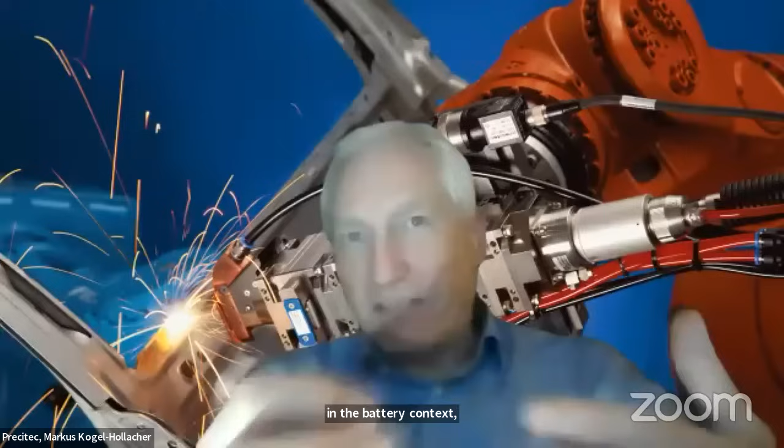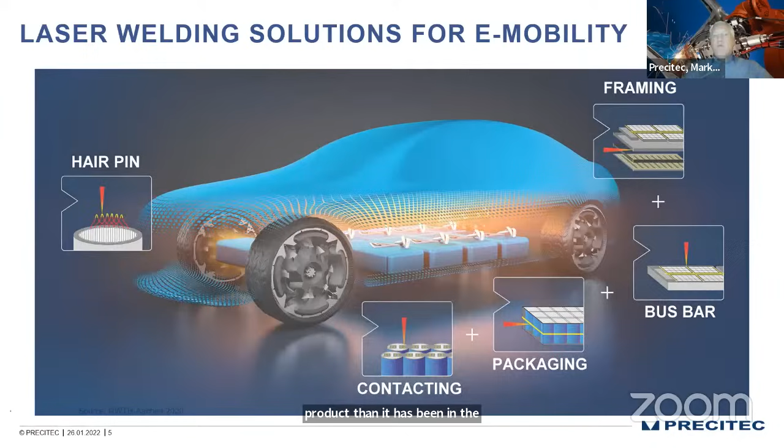The same is if we talk about the materials. If we talk about copper, if we definitely talk about steel - steel and lasers is a winning team, definitely. And I'm pretty sure Andreas Heider will talk about that in his presentation.

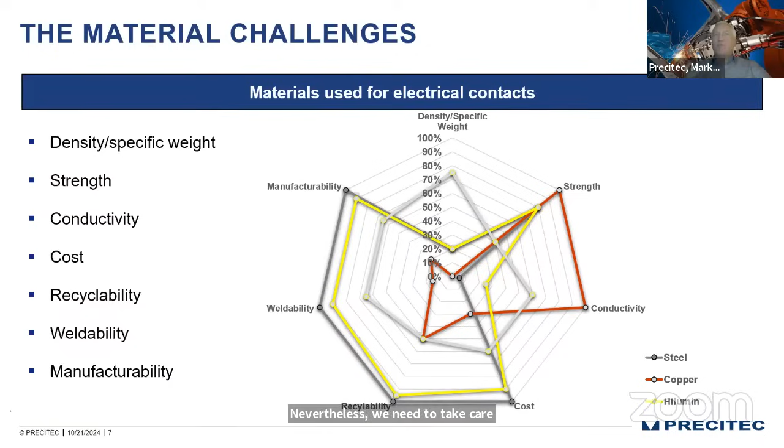Nevertheless, we need to take care about something which we haven't taken care about 10 years ago, and this is the point where we apply the photons. We have the freedom these days to bring the photons to the right point for the specific application, for the specific material. So it's not necessarily just top hat or Gaussian beam, as it had been 10, 15 years before.

We now have the freedom to work on that, and the freedom to work on that is to use beam shaping. There are a lot of choices on the market with respect to beam shaping based on optical elements, but also combiner technology, fiber manipulation technology, and coherent beam combining, which is the most impressive stuff and for sure the most expensive stuff these days, we have to admit.

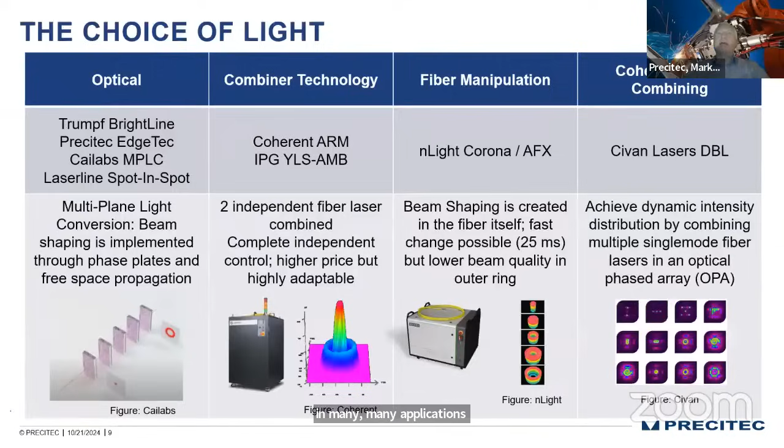Nevertheless, beam shaping is crucial, and it really helps in many applications, also in the applications we are addressing in e-mobility, to increase the quality of the final weld of the final product.

We have done so with our ScanMaster, which is a combination of many Precitec knowledge, from cutting to sensor technology to welding, which is all part of that ScanMaster.

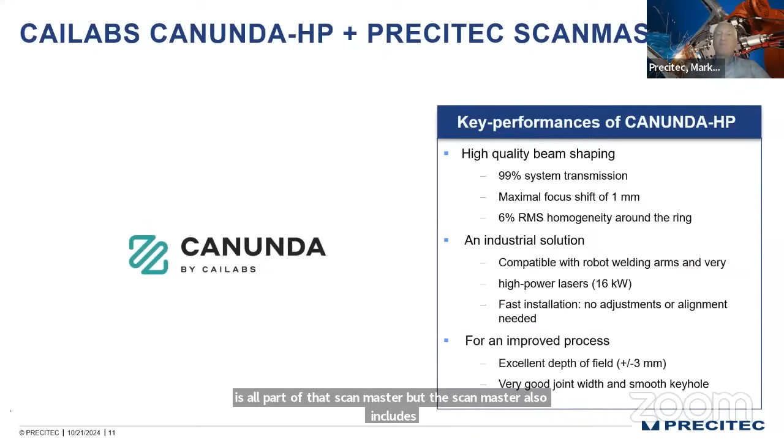But the ScanMaster also includes beam shaping technology, and we have partnered with Cailabs on that, because we have seen that that technology is for us the most promising one, because it can be easily integrated into our beam path, and it can easily change from the old-fashioned just Gaussian or top hat beam profile to a better profile for the specific application.

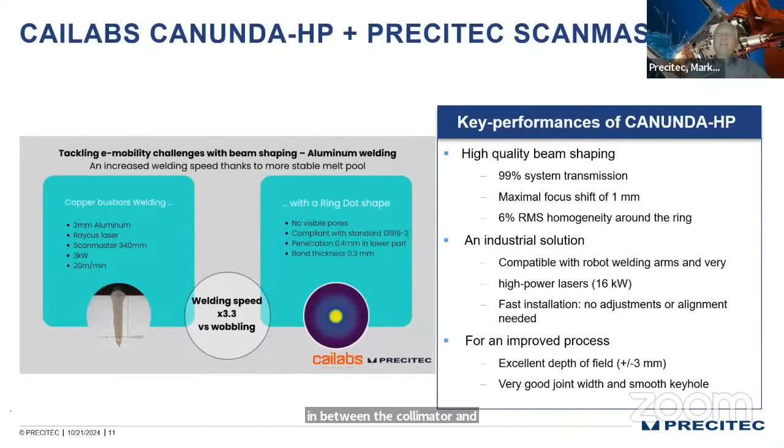Which means for us, it's just an add-on module, which sits between the collimator and the processing head, in order to change the intensity distribution, and in order to increase speed and reduce the spatter formation. So there are many benefits for us to include those elements, to include beam shaping in our beam path.

For sure, and this is what Antonio already said, we are also taking care about the quality by means of sensor technology. So there has always been, and there will always be, Precitec products with sensors - no Precitec processing head will leave the company without at least one sensor. And in welding, it's most probably photodiode sensors these days.

The old-fashioned way of applying photodiode sensors was to get the fingerprint of a process, to calculate envelopes for the upper and lower interaction limits, and to say the process is good or bad.

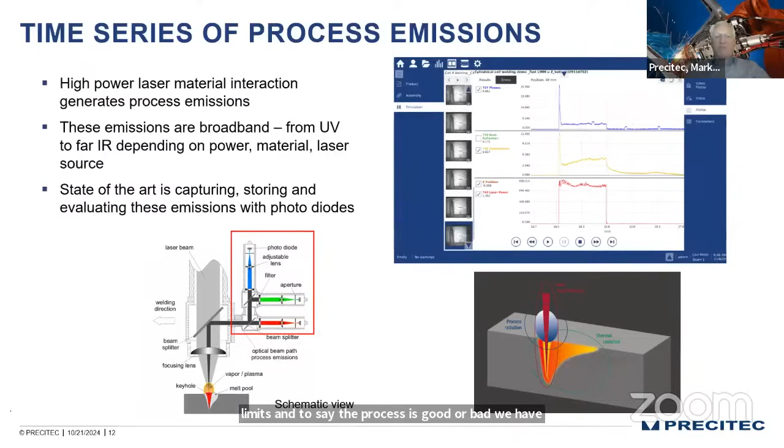So we have taken the chance with customers - one of the customers is Audi - to go one step further. We have now worked on the possibility to derive specific physical information out of that process light.

Customers like Audi, like others, approached us and said, we need more information - just red-green is not enough. We need information about, for example, the strength of the weld, or the electrical resistance, or the depth.

Okay, depth we had in our pockets already by applying OCT. OCT is one of those sensor technologies which was more or less pioneered by Precitec in order to measure weld depth during processing. But this is just one of the physical information customers were talking about.

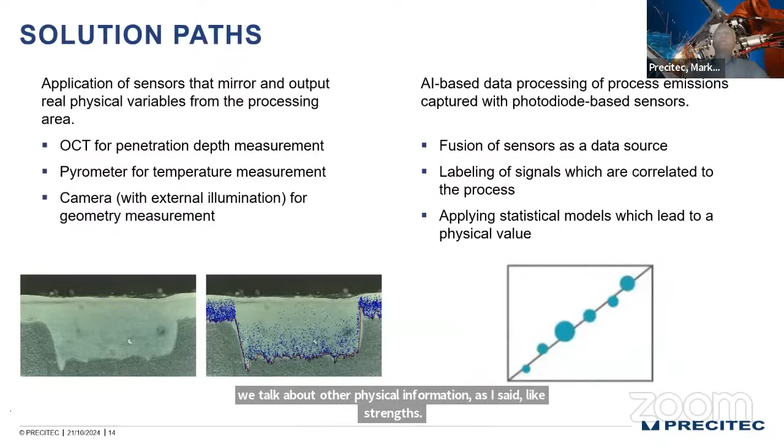If we talk about other physical information, as I said, like strength or electrical resistance, we need to go one step further. And this is AI - we need to apply AI.

We have increased our AI knowledge at Precitec by setting up a department at the University of Karlsruhe, which is the Precitec incubator. These are data scientists - they only know data science, they only know data processing. And they worked on applying specific deep learning algorithms on our time series data.

The one on the left is a high power application, 3.8 kilowatt aluminum welding. The one on the right is micro applications, nanosecond lasers, dissimilar materials. But in the end, for the artificial intelligence approach, it's more or less the same.

We applied an approach based on long short-term memory, LSTM, which is just one of many possibilities in the deep learning portfolio. LSTM may be known to some listeners as the deep learning algorithm behind Siri or Alexa. They also use LSTM.

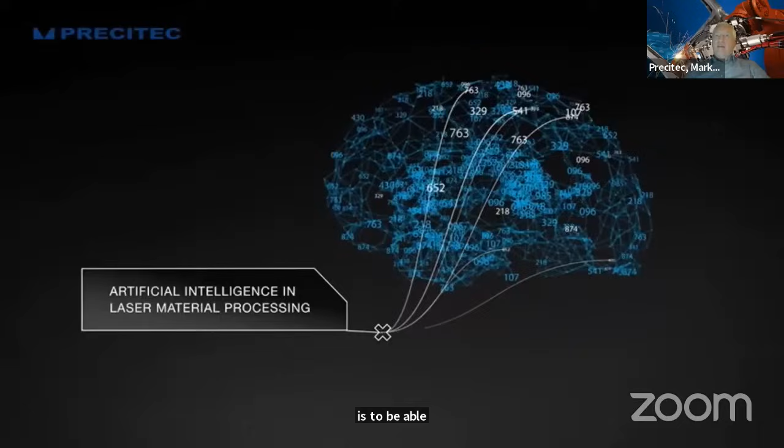In the end, our approach is to be able to work with AI algorithms on laser welding applications, to apply AI algorithms. This is one of the applications we're working on now, and it's different from the two I showed you before.

This here is battery contacting, and the important physical value here is the electrical resistance. Just for example purposes, we've shown here a zigzag welding. Customers use different strategies for welding these contacts.

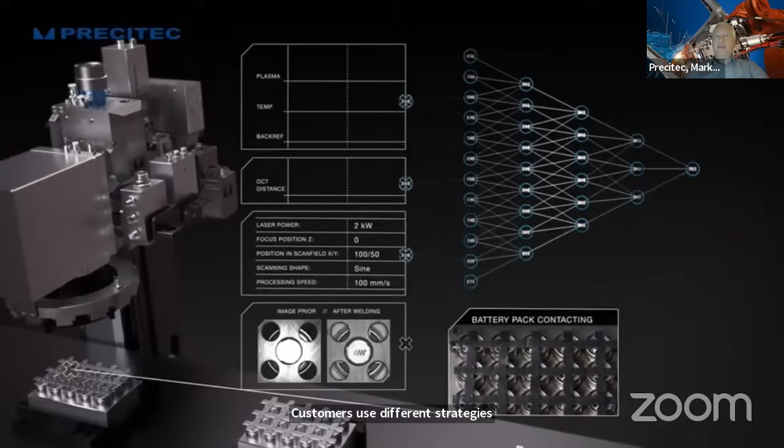Nevertheless, the idea is we get the time series data, apply AI, and in the end derive the electrical resistance directly in microohms out of the emission data coming from the process. You see that we can calculate good or bad resistance.

Together with the customer, we've taken the chance to apply a repair weld next to the original weld, with the hope that we can bring the electrical resistance to the desired value.

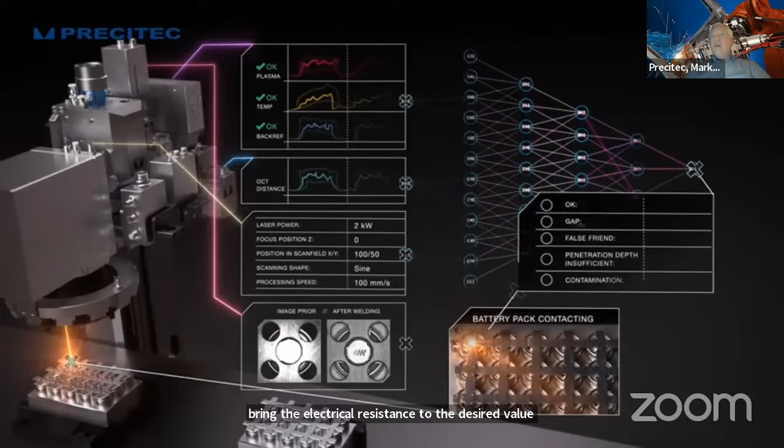We have one customer doing that right now. It's just starting, so for us it's also new technology, new experience. But we're hoping to convince more than that one customer on the profitability of applying AI in those applications, and maybe generate some kind of cloud.

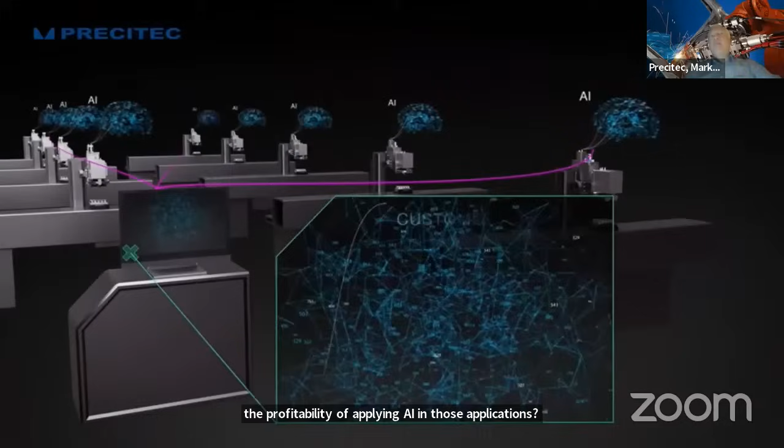A customer cloud, Precitec cloud, whatever the name is, so we can connect information over the globe. We are a small company, but nevertheless globally active, and maybe we can use that chance to increase knowledge and teach and learn our AI models across the globe.

So yes, these are the messages I hope you take home. It's an extra mile, and we go the extra mile. The extra mile is definitely with respect to AI.

We can check the box that we have successfully started beam shaping inclusion in our processing devices. We can check the box that we apply AI. Nevertheless, every AI application we do right now is

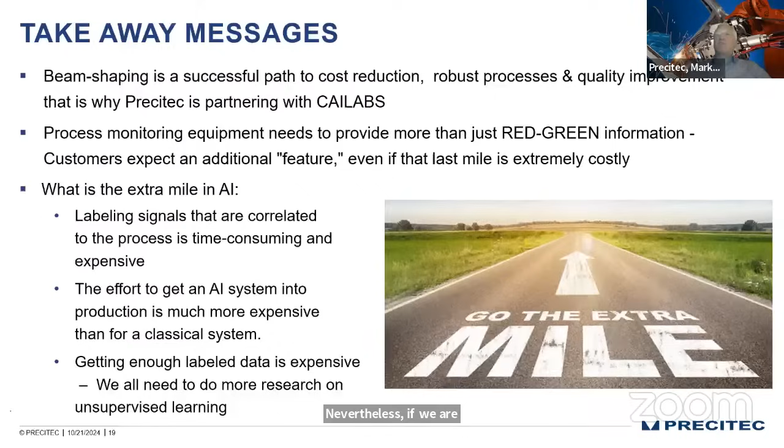a whole lot of work, because getting the training data is really expensive and time consuming. Nevertheless, if we're able to convince more customers, maybe we have the chance to continue working on that and make people happy. The typical epic question in the end: what can you do for them, and what can

they do for you? So we can provide knowledge on the applicability of AI methods in combination with laser processes. And we need customers willing to provide their data to make our work easier, to speed up AI applicability in lasers. Customers just need to be open to new technologies, and if they are, we increase the speed of that innovation. Thank you so much for your attention.

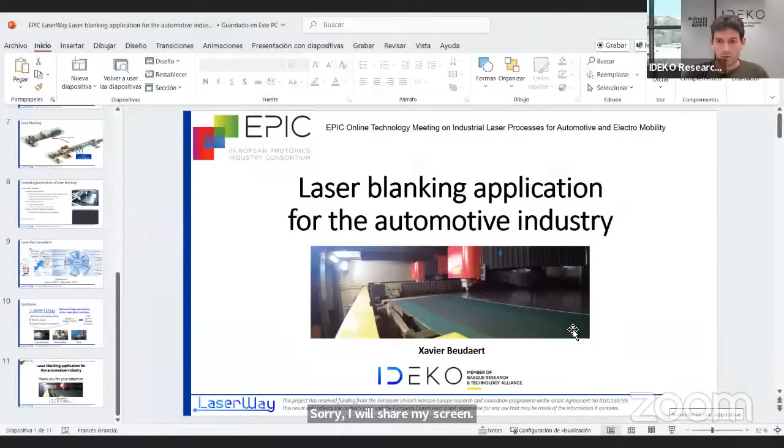Sorry, I will share my screen. So I hope you can properly see the screen. Yeah, everything good, Xavier, thank you.

So yes, as you said, for laser blanking applications in the automotive industry, it's a project funded by the European Union, and we're working on these laser blanking applications. The objective of the LaserWay project is to be able to go faster with laser technology and to replace the standard solutions. So as you will see, for laser blanking, it will be in competition with mechanical press blanking. And for that, we need to work on the different aspects of the process.

So the process itself, but also the machine design and the programming and program optimizations to be able to go faster and to be more productive with the laser technologies.

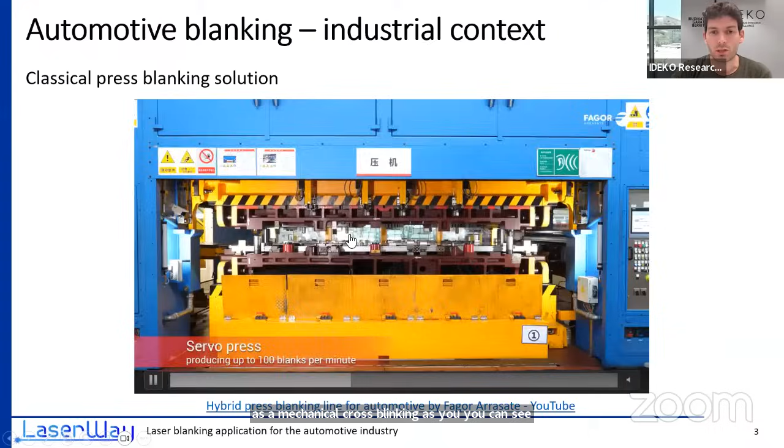So in laser blanking, we are competing against the mechanical press blanking. As you can see here, there is a coil of material, and with one stroke of the press, we can produce one side panel of a car.

This kind of process is very productive because the stroke rate of the machine is very high, but has little flexibility. So the objective that we have is to replace or complement the current technology, that is the mechanical press, with laser blanking technology that is much more flexible.

We can easily change the shape of the parts, whereas with the mechanical press, we will need to rework on the toolings. The setup is quite fast also, and we can program all the elements, so we don't need specific toolings for each part geometry.

And we can also optimize the use of material from the coil because we can have better nesting of the part geometries inside of this coil. The main drawback of the laser blanking compared to the mechanical press blanking is the productivity.

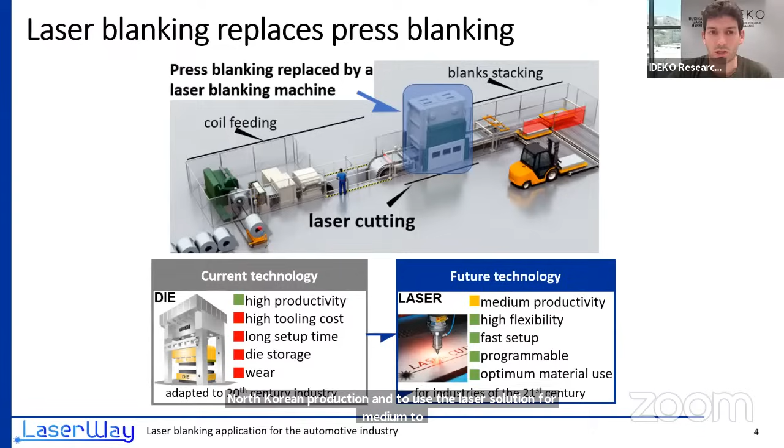So the idea is not to replace all the presses by lasers, but to combine both technologies to keep the press blanking for high batch and large volume production, and to use the laser solution for medium to low production batches, and when we need this flexibility to be able to change from one part to the other one very rapidly during the day.

So the laser blanking line is composed of different elements. First, the coiler, that is taking the coils and bringing it to the leveler. The leveler will make it flat, and then we will have a small loop before entering the laser cutting.

If we compare to classical press blanking, usually this loop is much bigger and requires pits or civil work because we need much more buffer of material before the presses. With laser blanking, we can have lighter solutions with a smaller loop before this laser cutting process.

And then we need a stacker that should also be a flexible solution because we want a complete line to be flexible so that we can change easily the production from one batch to the other one. So we need also a stacker that is either a robot or a robotic solution to adapt to the blank geometries.

You can see here a small video of what is a laser blanking process. So you see the laser cutting head that is cutting on top of an open hole so that the sparks can go down, and the coil is moving while the cut is being performed.

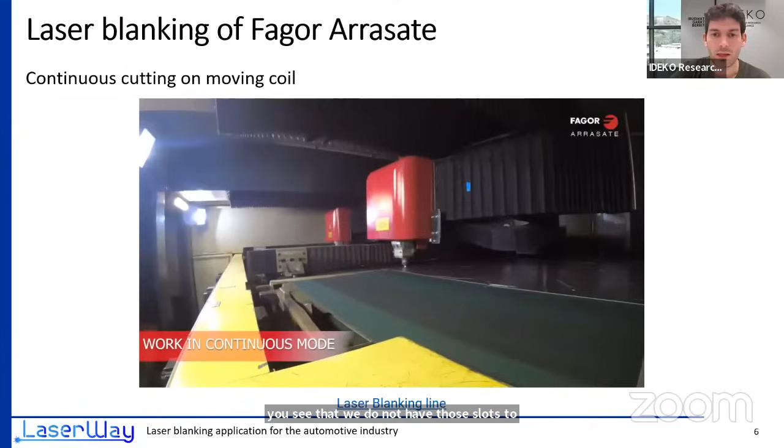So this is quite different from the classical format cutting machines, you see that we do not have those slats to support the part, but we have one band that is required to be able to move the material and the portions that are already cut within the skeleton of the coil.

And you can see also in the videos that we have two laser cutting heads cutting at the same time on the same moving coil. And so here you can see at the end of the line the skeleton and the parts that were taken from the skeleton.

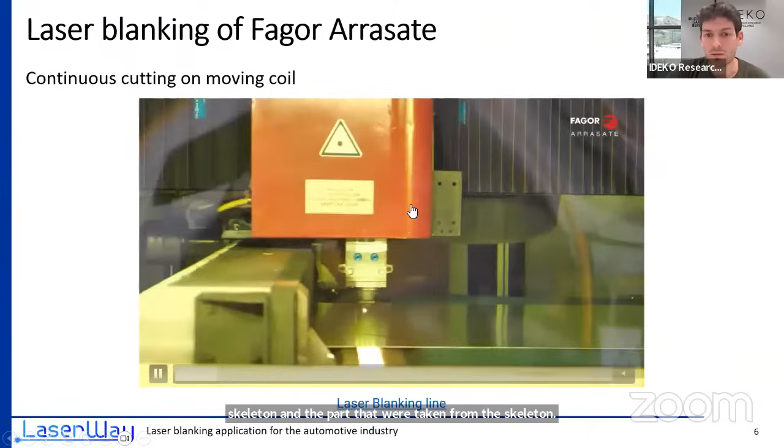So compared to the classical cutting process, we have programming challenges because of these moving coils and the fact that more than one cutting head is cutting at the same time on the same parts.

And to increase productivity, one solution can be simply to increase the number of cutting heads that can process the material on the coil. So this is one solution, but it also reaches its limit because when we have 2 or up to 3 laser cutting heads, then it's difficult to keep the balance between the working heads and to have them turned on all the time.

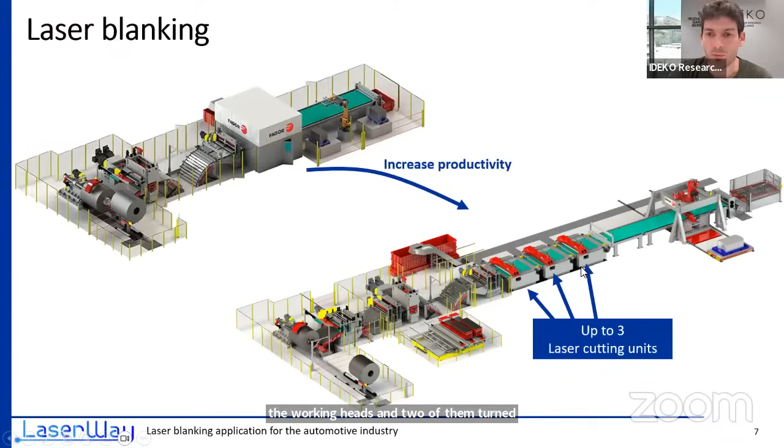Maybe one laser head will be waiting for the other ones. So within this European project, that is the LaserWay project, what we aim is to develop new technologies to be able to have faster machines, so to have high accelerations, and we are targeting 6G of acceleration.

And we can achieve this thanks to new innovative kinematic design and also the use of lightweight materials with composite fiber for all the moving parts, so that we can have a strong architecture with lightweight. We're also implementing online vibration minimization techniques because in this process, the main issues are coming from

the vibrations that are disturbing the cutting process, and also offline optimizations, as we have quite a lot of freedom in the path planning and work repartition between the heads, and this can be used to first optimize the repartition between heads, and also to smooth the trajectories so that less mechanical strength is applied to the machine due to the tool path.

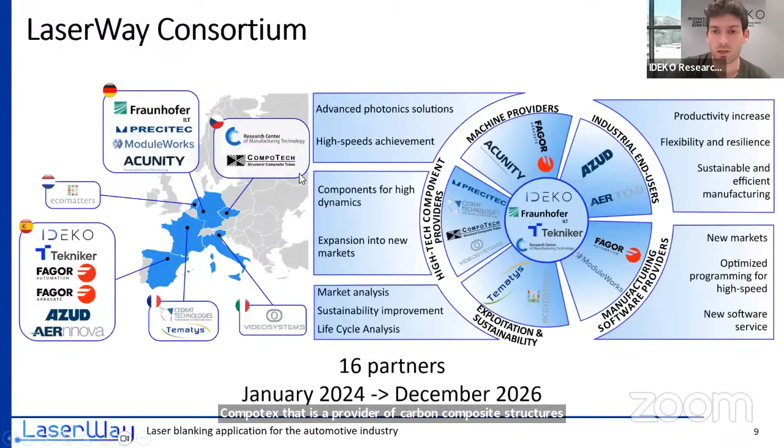Then in Germany, Precitec is the provider of the laser cutting heads and all the sensors and monitoring systems. We are working with ModuleWorks, which performs optimization of the toolpath geometry and nesting. And finally, in the Czech Republic, with Compotech, which is a provider of carbon composite structures, helping optimize the design so that we can have lightweight solutions and reach higher acceleration speeds.

To conclude, in this European project we have 3 main technologies. You have seen some information about laser blanking. We are also working on micro drilling and EHLA processes. All of them share the same characteristics of productivity, very high speeds, where we need to work on the different aspects of process, design, and optimization of the program to be able to reach this high productivity and replace more classical processes like mechanical press blanking. That's it for this presentation of today.

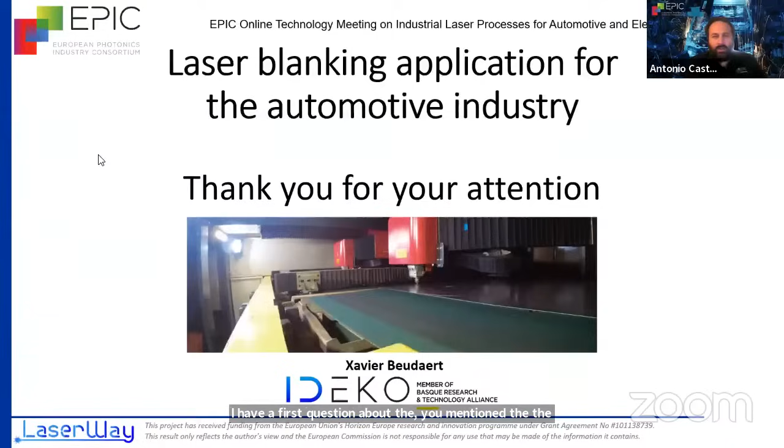I have a first question about you mentioning the minimization of vibrations. Could you talk a little bit more about the process that you are implementing? Is it something where you are including some kind of vibration isolation?

So for the first aspect, that comes from the machine design. We are making mechatronic simulations where we take into account the machine architecture. We know the moving mass, and we can design the machine so that we can reach those high accelerations without having large overshoots and vibrations coming from the mass of the moving heads that we are moving at high accelerations. This is the first step in the design phase. Then during implementation, as we are integrating also the CNC provider, we can slightly change the set points that are sent to the machine so that we can avoid exciting the mechanical frequencies of the machine tool, and like this we can reduce vibrations. So with online solutions also based on filtering techniques.

Okay, and what's the answer from the end users? Let's say you mentioned that this is not a technique or technology to completely replace the traditional one, also due to these issues with productivity. So do you see good potential to enter the industry as a complement? Do you still see some drawbacks that you need to solve?

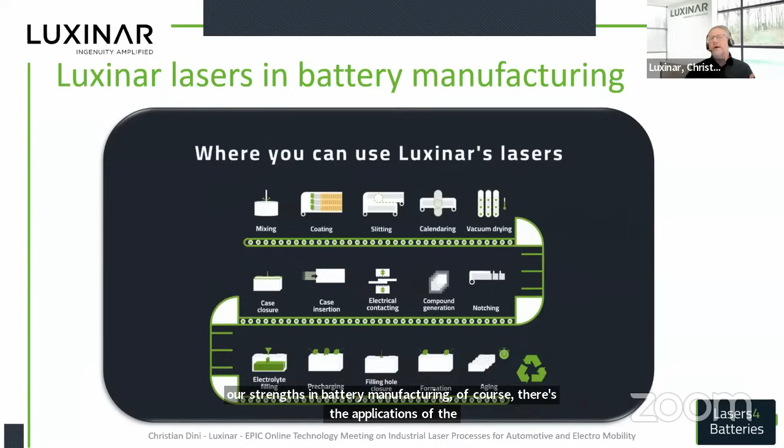Where do we play to our strengths in battery manufacturing? Of course, there's the applications of the ultra short pulse lasers, but other than that, there is everything where you have organic materials, foils of any kind, or even the organic liquid that's in the battery. I have brought two examples here, but here you see a quick rundown on different applications.

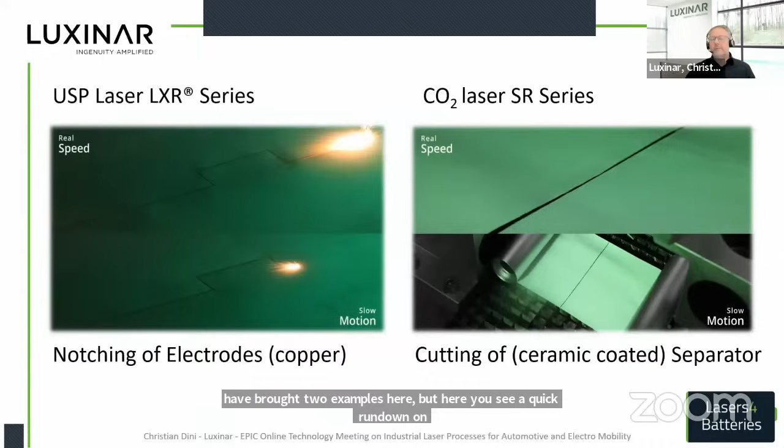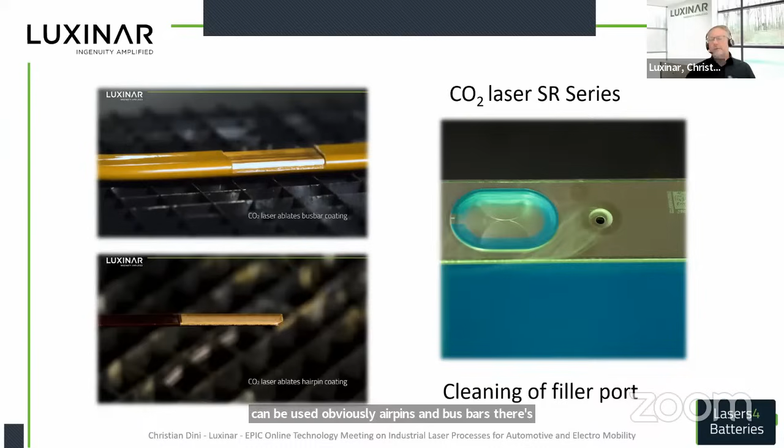Obviously hairpins and bus bars - there's quite a bit of conversation, let's say there's a challenge between this and fiber lasers, but it's a common application to us.

So why use CO2 lasers for batteries in general? There's a lot of organic materials present, which I already mentioned, and there's different wavelengths available for those CO2 lasers that interact with different plastic materials. Those lasers are really mature technology, and so the level of maintenance for these lasers is minimum.

Actually, the lasers themselves are maintenance free. You typically have to care more about optical beam paths than about the laser. This laser technology, also being a gas laser with a sealed gas chamber, has quite a long service life. We see anything between 30 and 50,000 hours of lasers being in continued operation. And if you compare it to today's pump diodes and seed lasers, that's quite an impressive number. So this is long lifetime.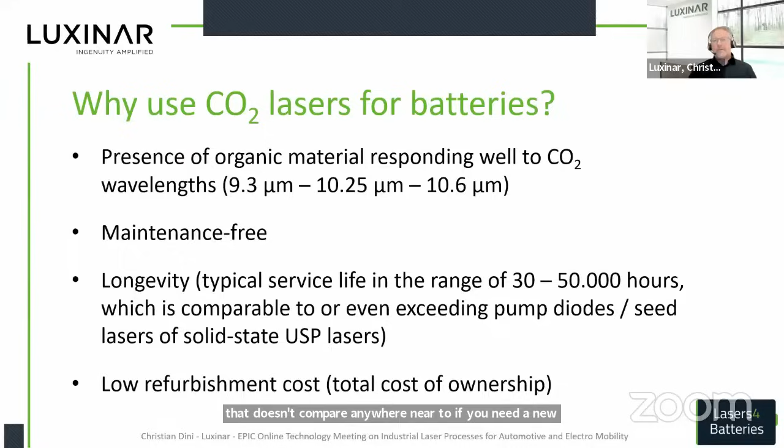Also, it's not solid state, yet it easily competes and compares to solid state technology. And finally, once a refurbishment is required, the cost of that is very low because you typically need a few optics and a new gas fill, and that doesn't compare anywhere near to needing a new set of pump diodes. So this is basically a very economical technology.

Now jumping directly into the two examples, not limited to the two, but the two I chose for today, which is the separator foils and unwrapping of batteries of prismatic cells.

So the separator foils, most of the time today, are still mechanically cut, but with the introduction of ceramic coated separator foils, there's a major issue with that. First, ceramic introduces a new level of wear to the knives, but also, more importantly, there's the dust contamination of chipped off ceramic parts. So if you move to laser, then you have a non-contact, no-wear process here.

The advantage of the CO2 laser over the ultra short pulse laser in that case is simply, again, what we had to review before - it's the low cost and the simplicity. Even if we talk about laser safety, you need just acrylic or some kind of polycarbonate housing, and you're done with a CO2 laser.

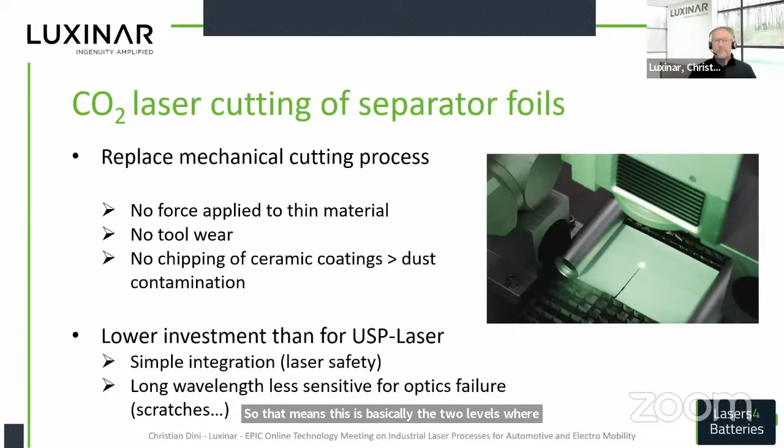So that means this is basically the two levels where it really excels: it is easy to use, and it is improving the economy because it's lower cost.

So what we did here this time is we tried to compare three different wavelengths on three different materials. In order to compare that, we created an environment where we have the same power and, let's say, very similar spot size, not exactly the same, but very similar. So we tried to create a condition where we really have comparable data between three wavelengths for three different, very typical separator foil materials.

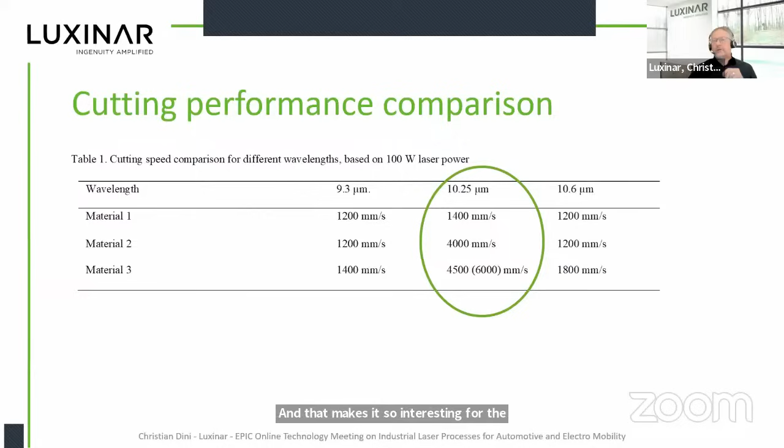Material 1 is a material where there is a ceramic coating applied. Materials 2 and 3 are PE foils, but they are not clean PE - there is a slight part of polypropylene present, and that makes it so interesting for the 10.25. But anyway, what all our examples show is that we get at least as good or much better cutting performance with 10.25 microns.

So this is something I recommend everybody to look into if thinking about coming up with a cutting station, a laser-based, CO2 laser-based cutting station for separator foils. And in this case, the 10.25 really translates into not only higher productivity, but you get up to 3 times, actually even 4 times depending on the material, out of the same production line if the laser would have been the bottleneck before using 10.6 or 9.3.

At the same time, the same cutting process requires less energy. So the carbon footprint of that particular process can be improved by simply using a laser wavelength that interacts more efficiently, more effectively with the material.

So just a quick wrap up for this application. We basically saw that the CO2 laser is a reliable tool, easy to integrate in that kind of application, very economic.

There is a discussion, one argument typically is, okay, but solid state lasers have a better wall power efficiency, wall plug efficiency, but that's not what makes the process efficient. Efficiency is how much power do I put in versus the cutting speed. So if my wavelength is more effective on the material and I can speed up the process, then it's the overall efficiency that I need to look into, not just the electrical wall plug power.

Those lasers have definitely a lower cost of ownership and simple operation. And by the way, since we are discussing this in Europe, I know from firsthand that this is already a standard in Asia. There, the distribution of CO2 lasers within battery manufacturing facilities and processes is much more developed than over here.

So little challenge to the European battery manufacturers: look at this and work with us so we can catch up with what in Asia is already going on.

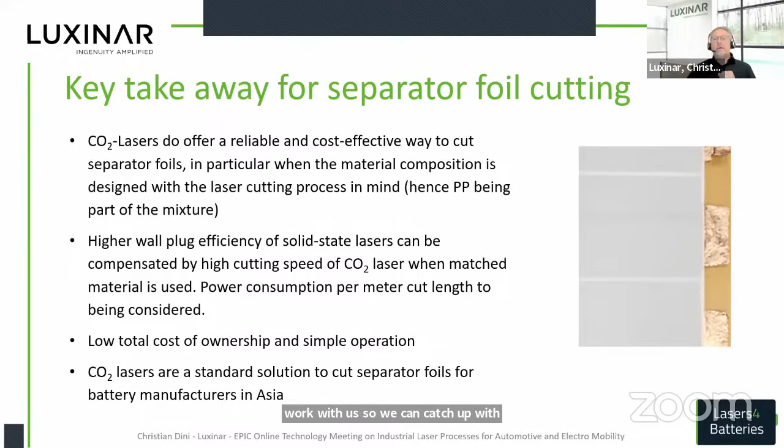The second process I wanted to show you today is unwrapping of batteries. Why would somebody want to unwrap a battery? We have 2 scenarios here. One is yield issues of battery production, where it's going as bad as up to 30% rejects.

And even if that number will come down over time with the growing number of batteries used in the field and coming to an end of life, even after their second life, the demand for recycling will grow.

Currently, this is a purely manual process. So it's really people sitting there with knives, spatulas, scraping and scratching, and then using very aggressive solvents to wipe off the stuff. It's definitely not a process that anybody really wants to do, but this needs to be done.

So we can introduce an automated process here that does not apply any force to the material, to the thin wall cell housing, and it's creating very repetitive results, avoiding scratches or any deformation of the battery, of the canister, because that will be reused - reused if it's from non-conforming cells out of production, and recycled if it's basically dead batteries after use.

The other thing, as we already mentioned, is the change from very aggressive chemicals that are not only aggressive to the user and the environment, but they're also an issue when you need to dispose them - or not really recycle them, but get rid of them, let's say it that way. So it's twofold: it's basically a more user-friendly process, and it's a more environmentally friendly process.

Not to say that there are no issues, because you evaporate a lot of material. But the key technology here really is it's a delicate process, because if you're working on ready-built batteries and you need to unwrap them and want to reuse and rework them, then you need to manage the temperature, because if you heat up the battery more than 80 degrees, the battery is damaged.

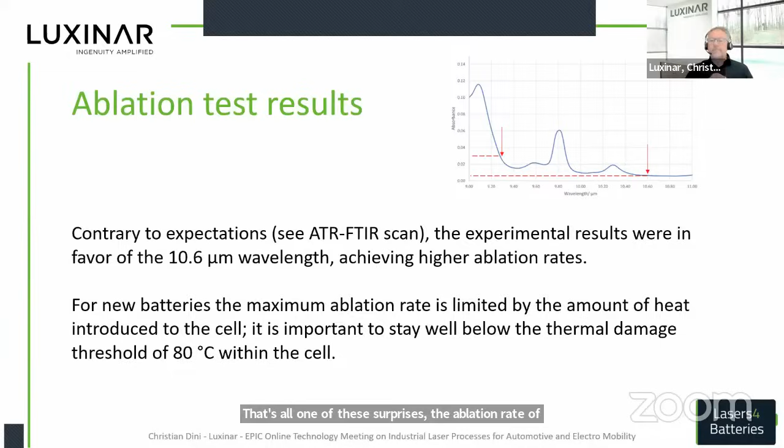We have a slide there - we always do spectrum analytics of the materials, and that is why we say, contrary to expectations, this plastic wrapping would have had much better absorption - very little absorption anyway, but much better in 9.3 than 10.6. But in the end, that's always one of these surprises - the ablation rate of the 10.6 was simply more efficient and better, so we went with 10.6 here.

So this is basically the outcome. We were in the low 60s centigrade, so the cell was very safe and there was no problem. The productivity was very comparable to hand scraping, and the power level we used was actually a 450 watt laser.

The one thing that doesn't work is you don't get a totally clean surface with CO2. There was a very thin sticky residue left, but that was easily wiped off with a little bit of isopropanol, a very mild solvent compared to what they typically use. And that could also be fully automated, so this whole thing, from removing the wrap to removing the residue, could be an automated process.

So what's the conclusion of this process? We can create a more environmentally friendly—I would not call it very environmentally friendly, but a less environmentally harming process. Definitely much better for operators. That's a major improvement, and it will give repeatable results and basically avoid more rejects because no mechanical forces and tools are applied.

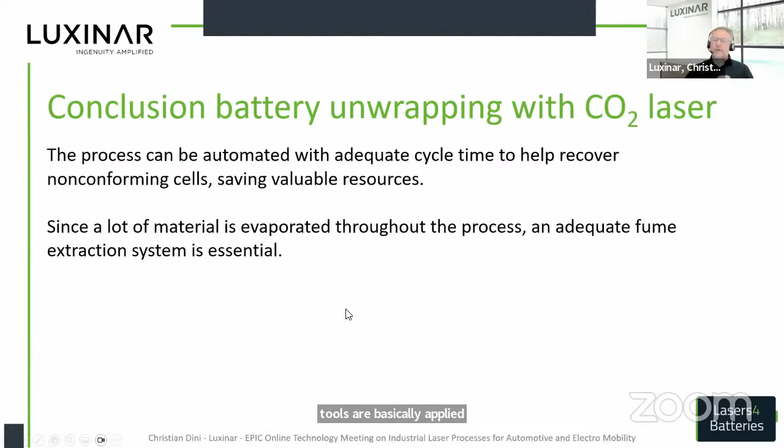Definitely one thing is the fume extraction. You evaporate all this, so you have to make sure you have good fume extraction and adequate filtering, so basically the remains of the process will accumulate in that filtering.

Then there's, let's say, a finishing process left, but in the end the total process is much more beneficial compared to what is done today. And with the growing demand of batteries, even if the yield improves, there will always be batteries right out of production that need to be reworked. So this is a measurable and controlled process to basically cycle those back into production.

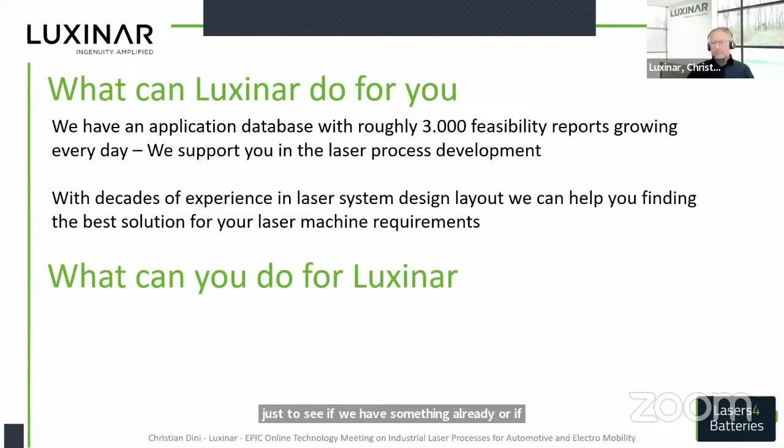And now we are here with the epic questions: what can we do for you? We refer to a database of about 3,000 different applications. If you have questions about whether it can be done, what is required, I think it would be a good step to see if we have something already, or if not, we will do application or process development work with you.

And that is also funneled through long experience of system layout, how to make that laser work in terms of beam delivery, beam steering. So we can guide you the way to a laser machine, or help you with the selection of a laser integrator that will build the best possible machine.

What can you do for us? Well, of course, speak to us. Whenever you see organic materials, please think about the good old CO2 technology. It's old but good, and it's still out there and needed. So yeah, we would be happy to talk to you.

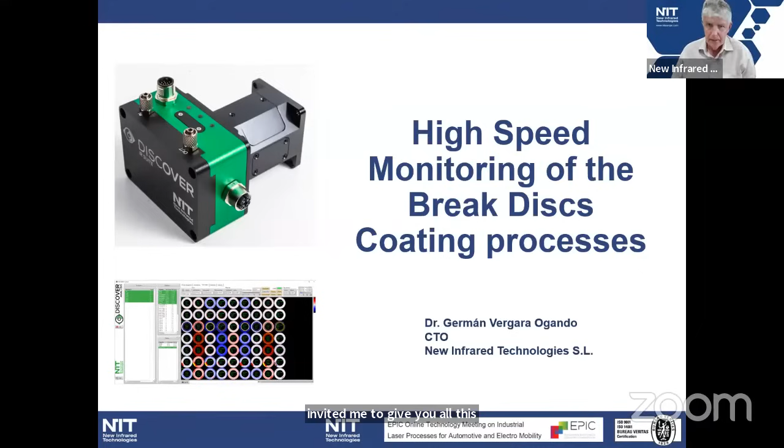Thank you very much, Antonio, for inviting me to give this presentation. Let me introduce NIT, a company based in Madrid. We produce infrared sensors and systems dedicated to monitoring industrial processes, and we have good experience in laser applications.

I'm here to speak about a specific application: high-speed monitoring of brake disc coating processes. Let me start with a small introduction about the problem. The motivation is that a big part of the contamination particles coming from a car is coming from the brake disc.

The European Commission thinks there is enough technology available for avoiding this, which is why they approved, some months ago, the new Euro 7 standard that will demand significant reduction in the emitted fine dust particulate coming from these brakes.

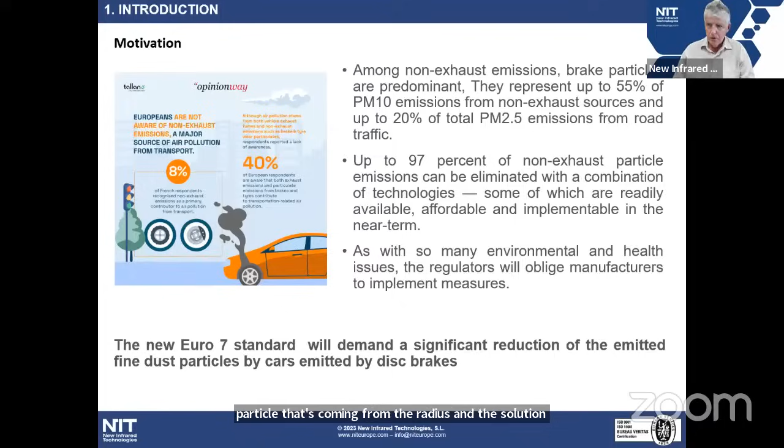So the industry has to work to reduce the particles coming from the brake disc, and the solution they reached was to apply a thin layer on top of the brake discs. There are a couple of layers involved, and they looked for the right technique for doing that.

Finally, there is consensus in the industry that this coating has to be applied by high-speed LMD, laser metal deposition. The reason is that coatings produced by high-speed LMD provide long and effective protection while emitting a very reduced number of fine particles, and they are compatible with Euro 7 requirements. It is a laser-based process, which is why the industry started to work in this area.

They try a lot of alloys, most of the people use titanium-based alloys with laser. The challenge for the industry is to reach volume production, because brake discs are produced in millions of units per year, meaning they need a repetitive and reliable process.

Don't forget that they are using very high power in some cases, more than 20 kilowatts. They have to find a good and repeatable process for doing that, which is why most of them have decided to use real-time monitoring systems.

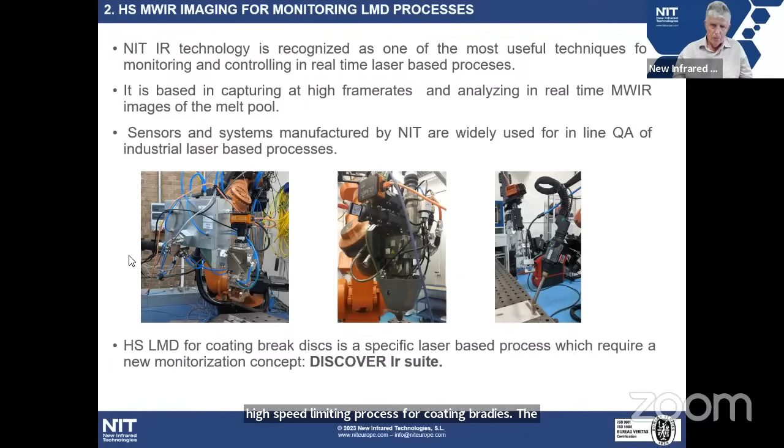Based on our experience in monitoring laser-based processes, we have developed a new solution for monitoring in real-time the high-speed LMD process for coating brake discs. The solution is commercially called Discover IR Suite, and let me do a brief introduction about this product.

Our infrared cameras image the melt pool. The melt pool is basically the result of the interaction of two main actors in the process: the laser and the powder. This is why we think imaging the melt pool is one of the best techniques for monitoring laser-based processes.

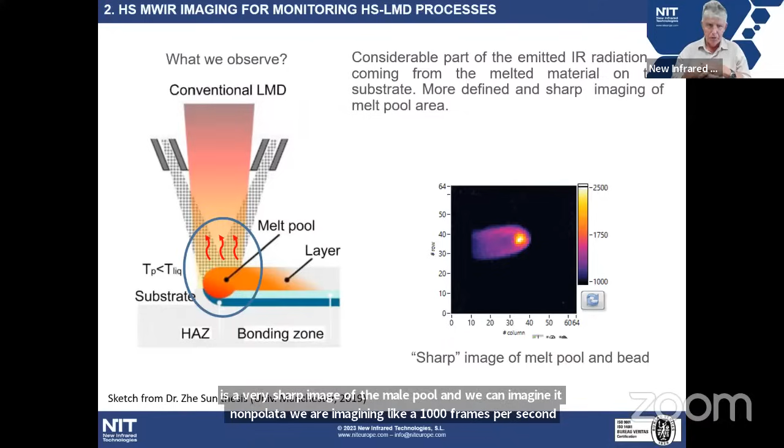The problem is, for LMD we more or less have a good system. In LMD, all the powder is melted on the substrate, and we obtain a very sharp image of the melt pool that we can image. Don't forget, we are imaging at 1,000 frames per second, taking 1,000 pictures of the melt pool per second, and we extract information from that.

But in the case of high-speed LMD, something is different, because the powder is melted above the substrate. As a result, the image that we obtain is like a blurred melt pool. We have to make an assessment of the process.

Only analyzing the information of this blurred image of the melt pool. And we did that - I'm not going to go into details, but we obtain 1,000 pictures like this per second, and we extract information about that just to be sure that the process is going well or not.

How do we do that? As I told you, we developed a Discover suite, specifically designed for high speed LMD for brake coating process. What we do is analyze every picture, and we extract almost more than 40 features of the picture. What is a feature? Features will be intensities, centroids, areas.

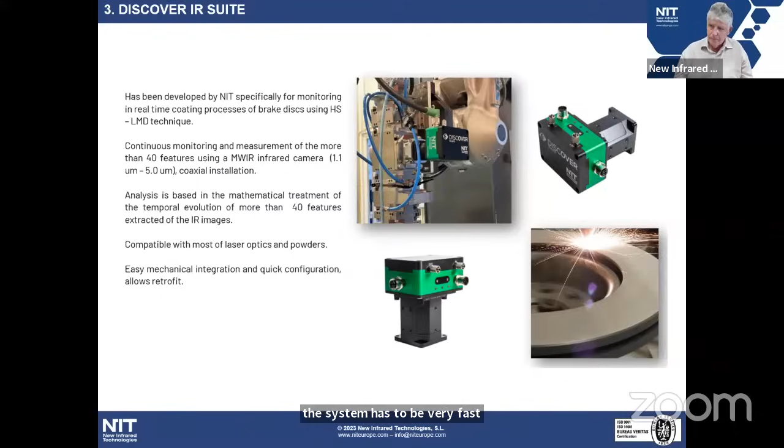We have a lot of mathematics for each picture, and we extract information from them. The system has to be very fast, and we try to do that. This is basically the part of the system. We have three different parts: this is the Discover camera, which is the hardware, and then we have the software.

The software is divided into different parts: the Discover production software, what we call HMI, and the Discover analysis software, which is used offline just for defining profiles. The hardware is the sensor chip, which has a double bus for faster data transfer.

You have to think that we have to be very fast. It has an Ethernet connector because we have to transmit a lot of data. We have cooling water for stabilizing the temperature of the sensor, and optics that are specifically designed for every customer.

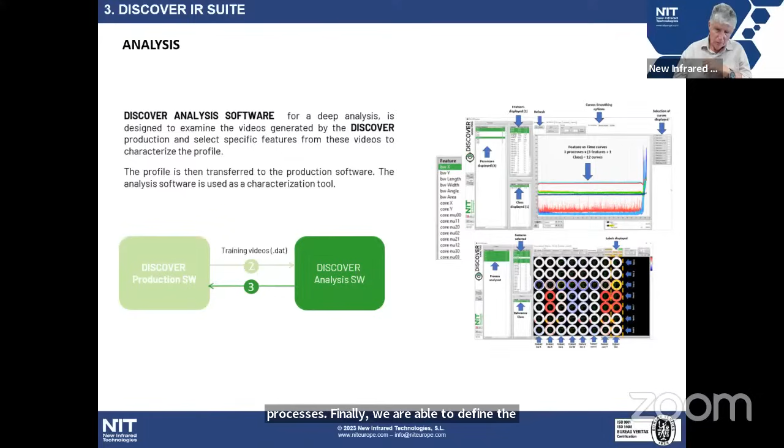The analysis is a very complex software. As I told you, we extract 40 features from the videos, analyze them, and compare them with other processes. Finally, we are able to define the profile that we have to load on the HMI.

The assessment maybe is the most important part, I think. Finally, what we have to do is tell the operator if the process was okay or not. It is maybe the most important part of the process, and the more difficult part of this system.

Right now we are really happy with the results that we have obtained, because our system has been installed in production already.

Just to remind you, basically Discover is a data killer. Don't forget that we are starting from multiple images, 1,000 images per second. The images are 64 by 64 pixels, a low resolution image, but the final amount of data that we have to process is around 66 megabytes.

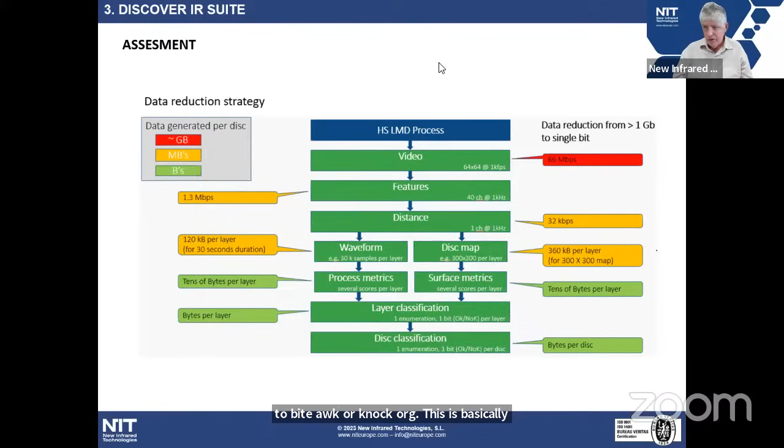What we do in Discover is kill, or basically extract all the information, because the end of this process is just to provide 1 bit, OK or NOK. This is basically the main advantage of using the Discover IR suite: to extract the right information in real time.

You have here some examples, but I'm not going to go deeper.

Another, and the last point that we would like to remark on, is that we have to advance toward automation. Don't forget that high-speed LMD for brake discs will be one of the first laser weld processes employed in volume, meaning 24 hours, 360 days, 24 hours, 7 days a week. This means that the sensor will be a key parameter for doing that.

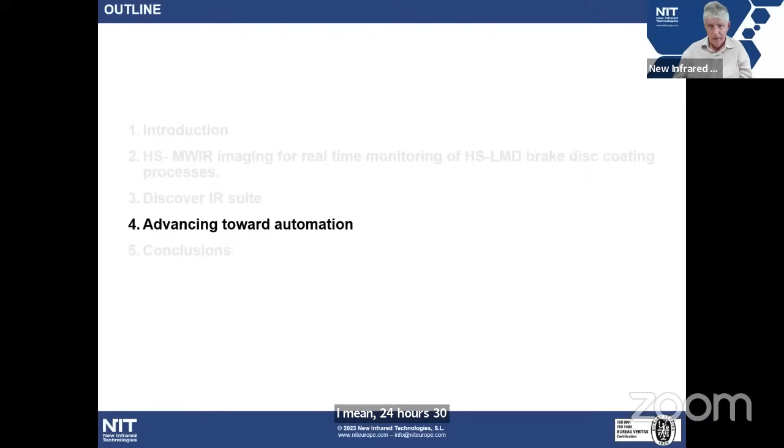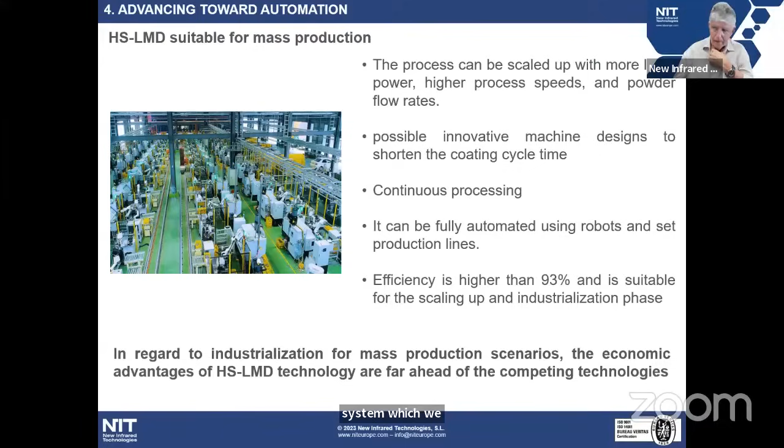It will be necessary to put all the sensors on the same network. I think Marcus has spoken about the importance of the data, the data analysis, and I think Discover IR suite will be a process system which will be part of the industry, the industrial process.

Here is the Discover data that we have. Actually, the HMI will record videos, area charts, heat maps and reports, and finally the machine-to-machine communication will have two different well-defined areas.

One of them will be connected by OPC UA for data access, and very importantly, will have Profinet real-time class 1 performance. I think we are ready for being installed in the industry right now.

In conclusion, the new Euro 7 standard will demand a significant reduction of the emitted fine dust particles by car. High-speed LMD is the solution that most of the industry has adopted. In regard to industrialization for volume production, the economic advantage of high-speed LMD is huge compared to other technologies, and it will be necessary to implement high-speed imaging for real-time monitoring of this process.

We think that Discover IR suite is today an excellent production and research and development tool for quality assurance and setting up high-speed LMD brake disc coating process. I think basically this is all I can say today.

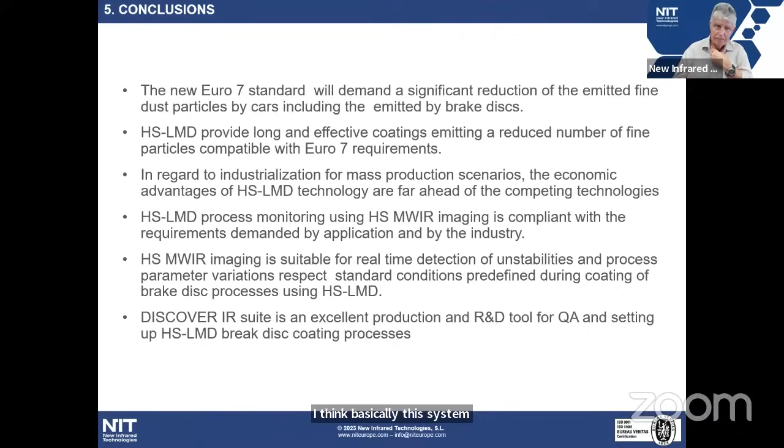I can start with a question about the information that you can give to the customer, because you talk about the profiles of the coatings, but you are also detecting defects, the variation in the shapes, which is the information that you obtain from the images. Okay, thank you, it's a good question.

Basically, the manufacturer has to define a base process, what we call a profile. Profile is a process that provides right coatings. If some deviation is coming from this process, the Discover IR suite will detect this deviation and also classify the deviation. Yes, it is possible to do that. I don't know if this is your question.

Yes, and is there any information on the thickness, perhaps variation in temperature? For my understanding, you are looking at the surface, but I just want to ask you if you can do something with the thickness.

Yeah, we don't provide thickness of the process. The information that we provide is coming from the melt pool, only the melt pool. I know that there are some manufacturers that are implementing both thickness and melt pool imaging. It is a strategy that some manufacturers are now working on.

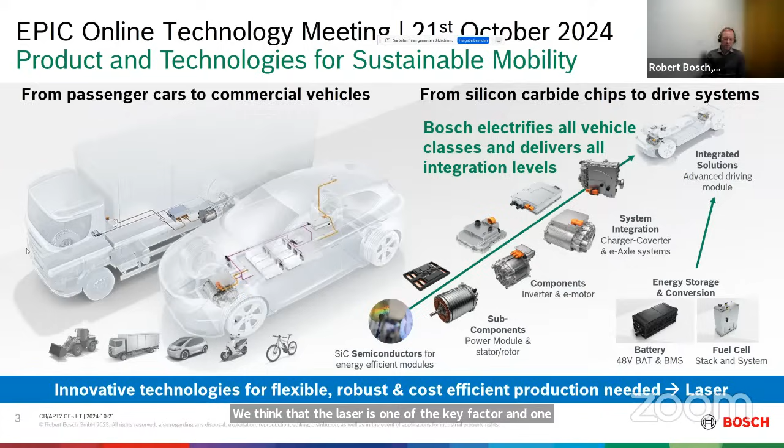And I think you all know that if we want to have such innovative products and if we want to develop and produce them, we have to have innovative technologies for a flexible, robust and cost-efficient production. This is very, very important, and we think that the laser is one of the key factors and one of the key tools to do so and to gain this productivity and cost-efficient production.

So we have very innovative products, for example, batteries and fuel cells, which increase in complexity and functionality, the power electronics and e-drives, and we need the suitable tool for producing them. The laser is one good tool. The laser is the enabler technology for new product features, for innovative products. It's a very high productive technology, flexible, automated, and has very low energy consumption. So overall, the laser is very cost efficient. So why not use this for mass production?

And there are some challenges to handle. This challenge can be easily explained just by a few simple calculations, for which I want to take you through small deep dives.

If we take a look at the changeover from the conventional powertrain to the e-powertrain, so from more steel parts to copper parts, not all copper but in most cases, and look at the requirements on the welds, we came from a thickness of the parts in the conventional powertrain of 300 microns to roughly about 1 millimeter. This was always for injection pumps or Bosch products, high pressure pumps. Now we end up with a very increased range of requirements for thickness we have to fulfill. We go from 10 microns for battery foils, for example, and end up, in this case for copper, welding 5 millimeter thickness, which is really challenging using lasers. For example, for busbar welding for e-drives.

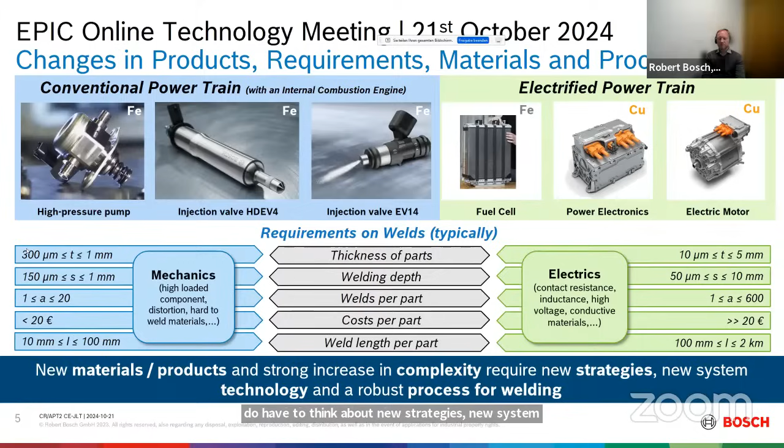Just another simple calculation to show you how important it is to know the process chain, and to consider all the things around the laser. This is done with a rough estimation by producing fuel cells, for example the bipolar plates. If we calculate the production of some bipolar plates, we have, for example, 150 by 250 millimeters square of the bipolar plates, then we end up with a sealing length, a welding length using the laser, of 1.2 meters. And if we assume one bipolar plate has an output power of roughly 320 watts, and we want to end up with, for example, a 100 kilowatt fuel cell stack, then we have to weld 384 meters in laser welds, and all the laser welds should be reliable and tight over the lifetime of the fuel cell stack.

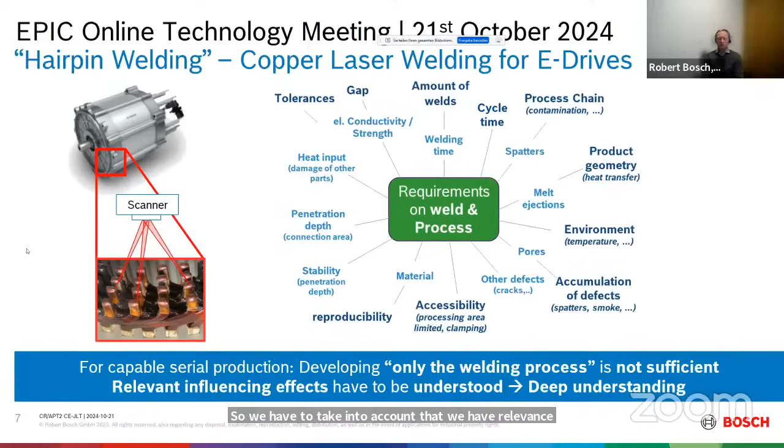So it's not anymore only about developing the weld itself. We have to consider the whole process chain. It's not sufficient to take only the weld into account. We have to consider relevant influencing factors and effects, understand the whole process and the physics behind the cause-effect relations. Then we can achieve a highly efficient production.

One easy example: if you want to weld stator production for eDrive, there's not only 1 or 2 or 100 welds done in the lab under perfect conditions. In production, at the very beginning you have perfect conditions, but for a production line running over several years, you have issues with the process chain, with contamination from parts you buy from suppliers, from the process chain itself.

So you have to know about the process, consider the process chain, and consider the interaction between contamination and other effects for a stable welding process. It's not enough to look only at the lab—you have to take into account the whole process chain. You have to have a deep understanding of the influencing factors across the whole chain, and this becomes very important for mass production, especially for e-mobility.

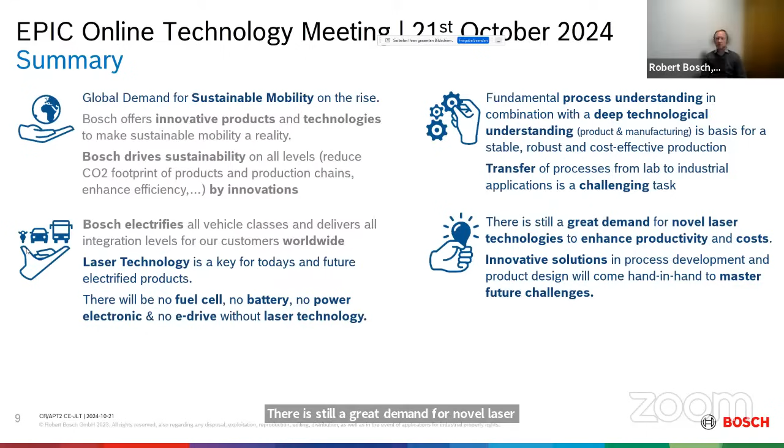There is still great demand for novel laser technology, still rising. We have innovative solutions, so I think together laser technology has great potential, and we can make the future with sustainable mobility if we transfer this technology USP from the laser to real products. Thank you—hopefully I could give you a short overview of the challenges in e-mobility.

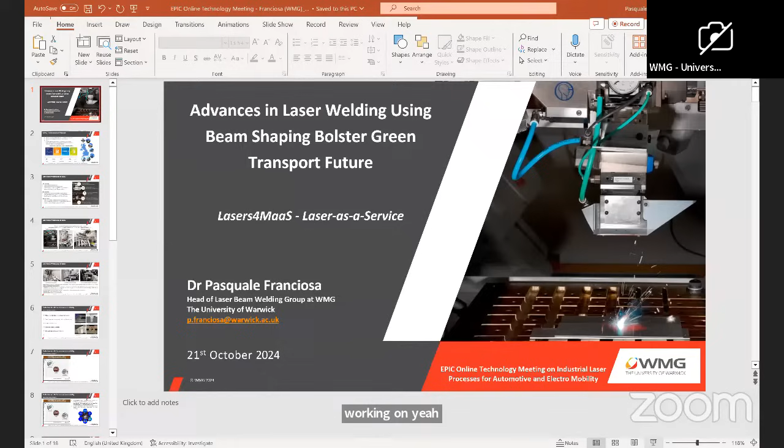Thanks again for the introduction. So my presentation today is pretty much around beam shaping, static, but most of the content is around dynamic beam shaping for e-mobility applications. So that will be the main topic for today.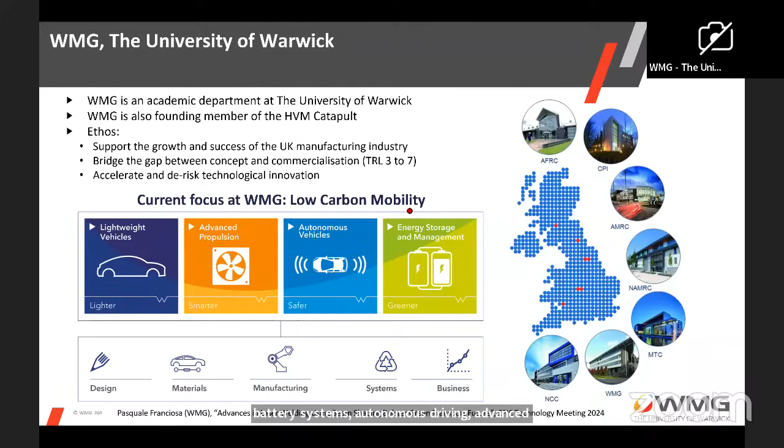So we are very automotive focused. The main focus for us is low carbon mobility, so anything around low carbon mobility, starting from battery systems, autonomous driving, advanced manufacturing technologies. Everything really moves around that in terms of research, development, and applications. The laser welding lab has 15 people on board between researchers, students, and PhD students. The team has been growing over the last couple of years and is still growing, which is positive news. So what we do, you can see here, we cover these 5 main areas.

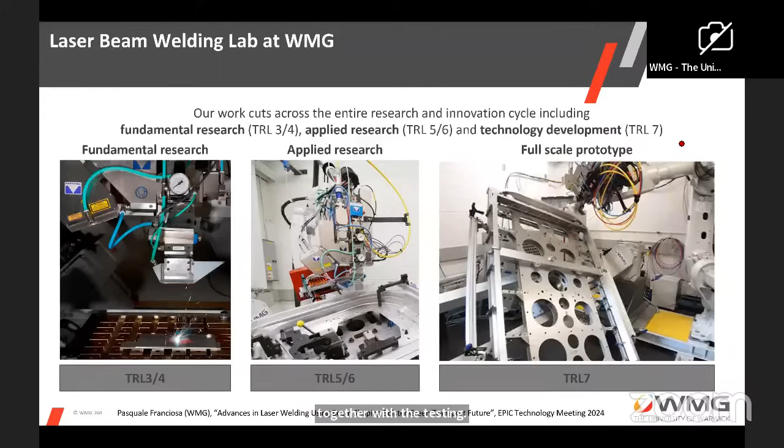Talking about the TRL level, this is what I usually show. We can start from feasibility studies, eventually understanding the metallurgy of the material for a given laser input. And then we can go, together with end users, all the way up to TRL 7, which is full-scale prototyping together with the testing. So yeah, from fundamental research all the way to full-scale prototype.

Probably I'll go very quick on this. So the laser lab, we are very laser welding focused. The lab has been growing, and you can see here some of the equipment we have available now. I don't want to mention anything in detail, but you can see some of the laser optics, sensors, and software we also have available for process development. We have recently installed the Civan laser, 14 kilowatts, and I will show some results in the next couple of slides. So now let's come to the main point.

Production at scale for e-mobility. From our experience working in battery system related welding projects, pretty much all the end users are asking for five points. First is about welding, so novel welding strategies, and these days de-welding also becomes quite important. De-welding means end of life, or even repair of a defective module, like a bus bar. And they are really asking for sustainable strategies for enabling welding plus de-welding. So that is an important element.

There is a huge demand for new material combinations, especially for mixed materials - steel, copper, aluminum - which probably everybody is aware of. Cost reduction is always a big deal when it comes to laser technology, because compared to other technologies, laser is always more expensive. So there is always a desire to justify the investment, and one way of justifying it is through the core benefit of the laser technologies.

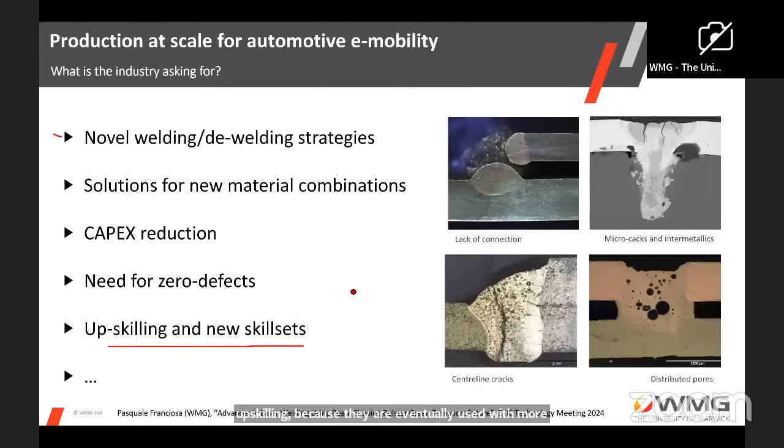And this is something we see more recently: people are asking for training, for upskilling, because they are eventually used to more traditional joining processes, not so much laser-based manufacturing, and there is quite high demand now for upskilling the workforce.

Now, the reason why - and this again is from our experience - people are sometimes afraid of using lasers. First is because of the high capex, and this is probably because people very much associate laser technology with productivity. When we talk about laser, it's about speed, it's a fast process by definition. So very often we position ourselves on this level - we say we can use a laser process to maximize productivity, but then we forget about the second benefit of laser, which is flexibility. Laser is a very extremely flexible tool if used in the correct way.

And this is where we see the biggest benefit or opportunity of beam shaping, because beam shaping, either in time or in space or time and space together, is where we see the biggest opportunity. Beam shaping is nothing new - technologies for it have been around for probably more than 15 years by now. But only these days, because of the latest advancements in scanners and laser systems, and because of the demand from e-mobility, we see people asking more and more not only for productivity but also for flexibility. So flexibility for us is the next upcoming requirement from end users, and this is true especially when dealing with low volume and high diversification manufacturing.

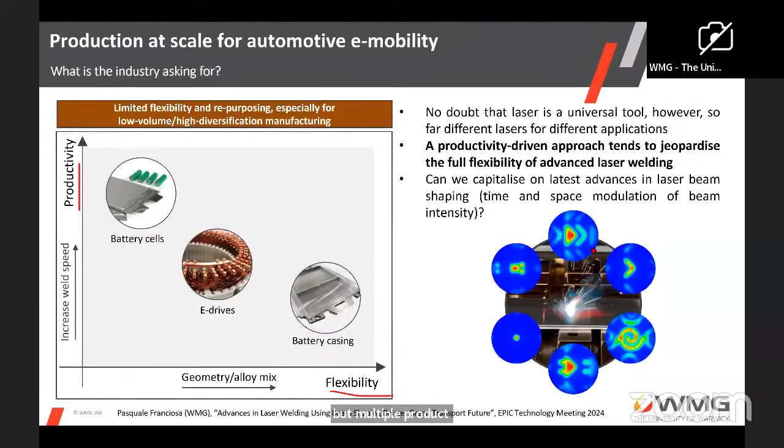So it means it's not only one product type, but multiple product types. And this is exactly where the flexibility plays a role. So this is where beam shaping comes into the picture, and is the motivation for the beam shaping.

So why beam shaping in the first place? Probably for three reasons. First, because we can have a more optimized weld profile, or we can control the weld profile. Second, and this is probably where most people are focusing their effort these days, is the control of the molten pool and the keyhole dynamics, eventually for reducing porosity and spatters. And then another area of interest is the control of the microstructure.

Statistically speaking, there is a lot of academic work and industrial implementation around the first two areas: weld profile and molten pool dynamics. There is very little on using beam shaping for controlling the microstructure. There are some academic contributions, and probably a few industrial implementations, but most of the emphasis is around the first two. Now we believe that using the correct beam shaping, we can also influence the microstructure, and that's why we have been investing time and effort in doing that.

Now the material which is in very high demand these days is aluminum, specifically 6000 series aluminum, especially for producing battery cases and battery trays. There are many designs and architectures where end users and OEMs are using those extrusions, especially extrusions for producing battery casing. So the practical challenge is the weldability of the 6000 series.

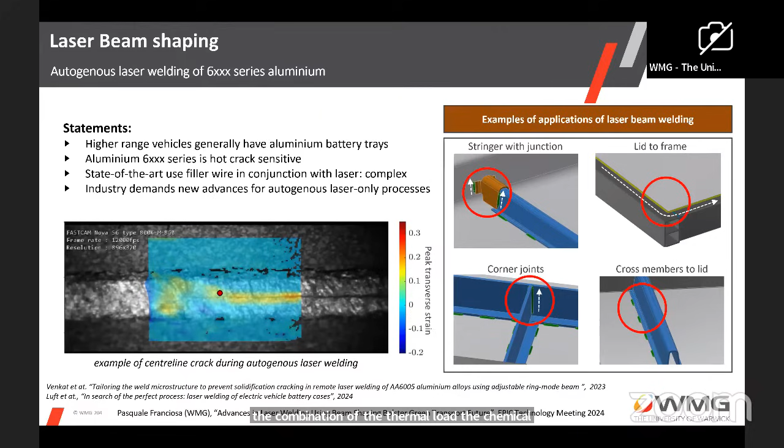Now this video is clearly showing a very nasty crack opening in the middle of the weld. This is a centreline crack. The color map is showing the strain induced by the thermal load, and obviously because of the combination of the thermal load, the chemical composition of the alloy, and the microstructure, you get cracks in the end. So it means those welds are not really functional.

So how we want to approach it is using beam shaping, dynamic beam shaping in particular. We have been testing over the last few months the technology from Civan, so the coherent beam combiner with optical phase array. Without going into the technical details of the setup, in essence it's a 14 kilowatt total system, although for the materials we have been using, we have used far below, around 3 kilowatts.

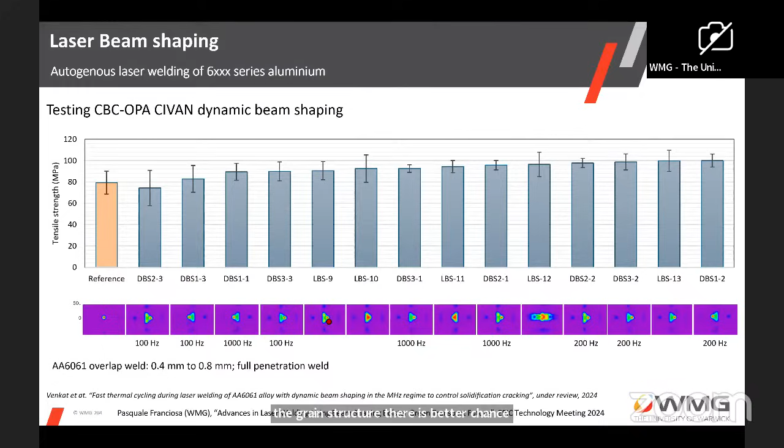has two main benefits. First, the possibility of changing the thermal gradient, especially in the lateral direction. And then, reducing thermal gradient eventually reduces thermal stresses, and reducing thermal stresses, because of the impact during solidification on the grain structure, gives a better chance that the welds will sustain the thermal load and wouldn't crack in the end.

And the results are quite evident here. So clear benefits we see in using the beam shaping, but there are also clear challenges.

One of the biggest challenges is: okay, great, we have all this flexibility, but flexibility comes with a cost. First, how do we choose the optimal shape? It can be anything, right? We can start from a core and ring, add a triangle on it, add a tail beam behind. That is a big open question. To answer this, we have to understand all the physics behind the interaction between the laser and the material, the laser and the molten pool, with all the multi-physics and multi-scale elements involved.

So the controllability challenge is definitely there, which we must address.

The next challenge is acceptance. More flexibility means more costs for the end user, and we need a clear business case to justify why more flexibility eventually benefits the end user.

The next is reconfigurability. That means it's not only the laser process alone, but the laser together with the jigging, the clamping, and all the automation around it. And talking about AI and this Industry 4.0 logic, there's connectivity. It's not like a standalone laser machine, but the machine must be eventually connected, and we have data collected from the process, and using AI technology we can have a smart system in the end.

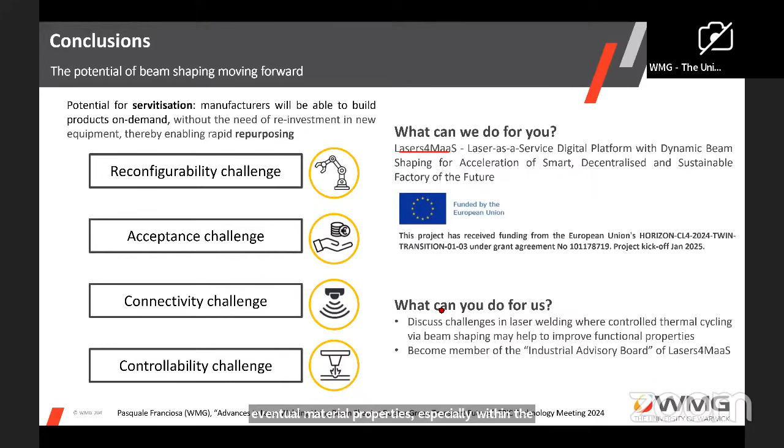Especially for those companies or institutions that see the benefits or opportunity of using beam shaping for controlling thermal cycling and improving eventual material properties, especially within the logic of laser as a service. The logic of rapid repurposing and servitization in general.

So with that, I close my presentation. Now, if there are any questions, I'm more than happy to take any questions from the audience.

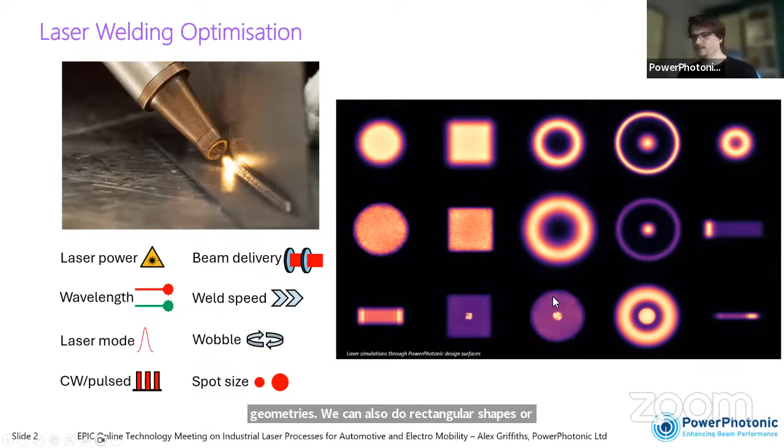I don't think I need to convince this audience why we're using laser welding for manufacturing electric vehicles. But even with the advantages of laser welding, there are a number of challenges presented by welding electric vehicle components. Things like weld geometry and welding of dissimilar materials mean you really need to optimize your process. There are parameters you can play with to get the best performance, either from the laser side or how you deliver that energy to the workpiece. With beam shaping, you're pushing beam delivery to its logical limits, putting power exactly where you want it. On the right, I've got example outputs from beam shaping optics we've manufactured at PowerPhotonic - standard homogenizers for a uniform flat top, circular, square, or any geometry required, increasingly common ring or core-and-ring geometries, rectangular shapes, and in the bottom right some more unique asymmetrical beam shapes.

A little bit on our manufacturing process. We have a laser-based manufacturing process that's been optimized for fused silica. Starting with a flat substrate, ablation produces the large-scale structure of your optic in a point-by-point manner.

Afterwards, the surface is laser polished. This reflows the surface and produces an optically smooth finish. This means we retain the bulk properties of fused silica. We have high power handling and low surface roughness, which means low scatter.

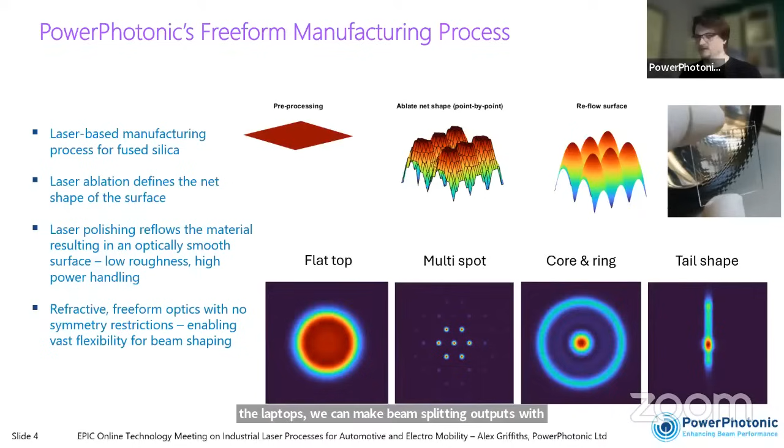In terms of how you install these into a practical system, for R&D trials, we've had some good results so far by replacing a protective window with one of our optics. These process heads will typically have at least one protective window somewhere in the system. We can remove that, replace it directly with an optic of the same geometry to generate the beam shape at the output.

This is good for a quick test. Might not be practical for a full manufacturing system. These really aren't sacrificial components, and you don't want to treat them as such.

This module could sit anywhere within the process head. We typically prefer it to be in the collimated path, but it's just another design consideration to mount it somewhere in the diverging or converging positions. Similarly for a scanning head, if you've got a Galvo scanner, we would mount this somewhere before your scanner, ideally in the collimated path.

Moving on to some actual beam shapes, the core and ring shape is becoming quite commonplace. There's a number of ways to generate this and a number of solutions out there already. Something quite specific to our method of generating this is we get a long depth of focus, so you get a core and ring caustic, not just a core and ring profile.

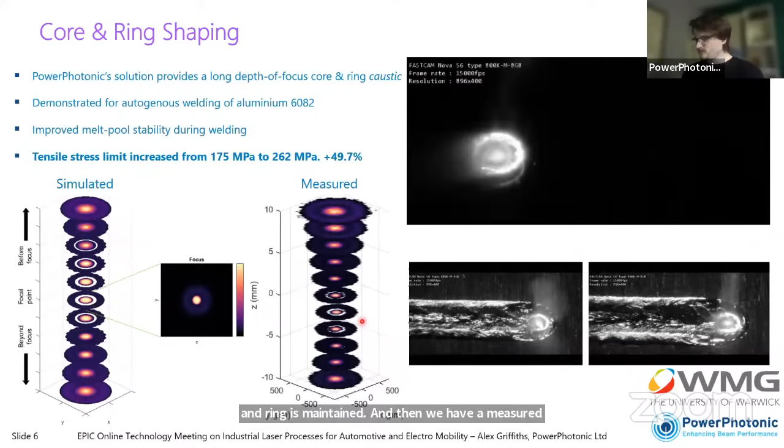We've done some application trials with this for welding of aluminium 6082 in an autogenous manner, so no filler wire and no shield gas. This high-speed video here is the welding, not real time, in slow motion. We see improved melt pool stability during the welding.

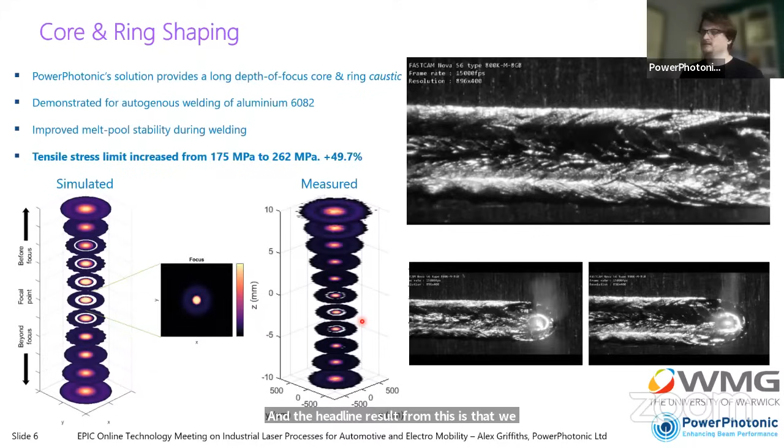There's a reduction in the amount of spatter coming from this core and ring beam. The headline result from this is that we got nearly a 50% increase in the tensile strength of the material after the weld was done compared to welding with no beam shaper.

Moving to something more unique to us, we have this tail, what we've been terming the tail shaper output. This is an asymmetric beam that's been tailored to match the asymmetric nature of the welding process. So we have this linear shaped spot that would translate in the direction of the weld. You have this high intensity spot here that's still generating the keyhole and performing the weld, and a lower intensity tail that follows it behind.

These particular trials were done in an aluminium alloy. We also have some similar results from simulation that indicate that this elongated keyhole from the asymmetric profile reduces the probability of seeing porosity within the weld.

This set of results is our last set I have today. This is a customized beam splitting optic that we developed, where we've aimed to have a 3-spot output with two of the spots trailing the main spot with 50% of the intensity, and these would be separated laterally either side of the weld.

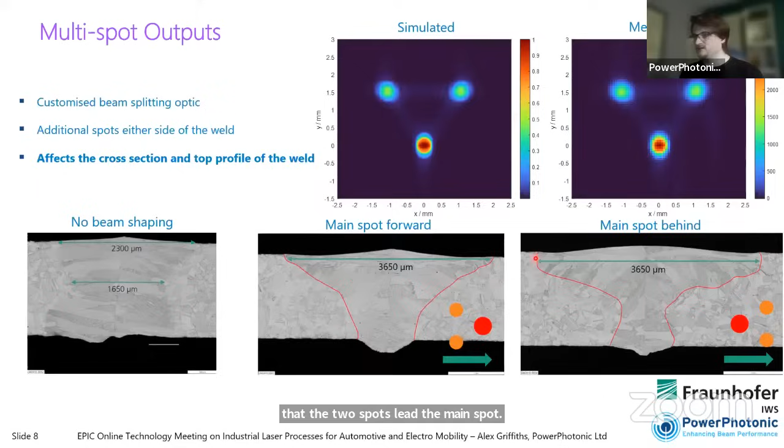This shows a strong influence on the weld's geometry, on the geometry of the weld seam. On the left, this is the case with no beam shaping, whereas when we have these additional spots, the width of the seam at the top is much wider. But also you can see there's a variation in the profile, so it peaks here in the middle. And if you reverse the direction of the beam shaper so that the 2 spots lead the main spot, this shape changes as well. So directionality is important, and we can have a strong influence on the cross section.

To conclude, I think I've demonstrated that these refractive freeform beam shapers provide flexible intensity patterns with simple system modifications. It's a straightforward addition of a single extra optical component. And the intensity patterns can be tailored to affect key parameters in the welding.

What we can do for you is provide beam shaping optics and highly customized freeform intensity patterns to enhance various processes. And what we're looking for from others is to be presented with the challenges seen in laser applications, so that we can collaborate on optimizing these intensity profiles for a specific application.

Just to finish, I need to acknowledge that as an optics manufacturer, we don't have capability to do welding in-house. So these trials have been done, some with Fraunhofer IWS and some with WMG, with Pasquale's group, who we've just heard from.